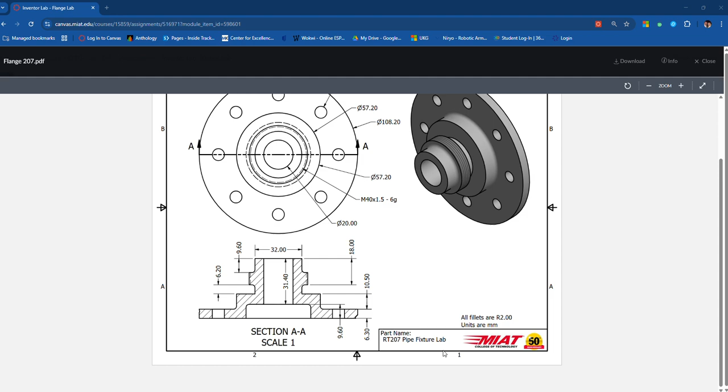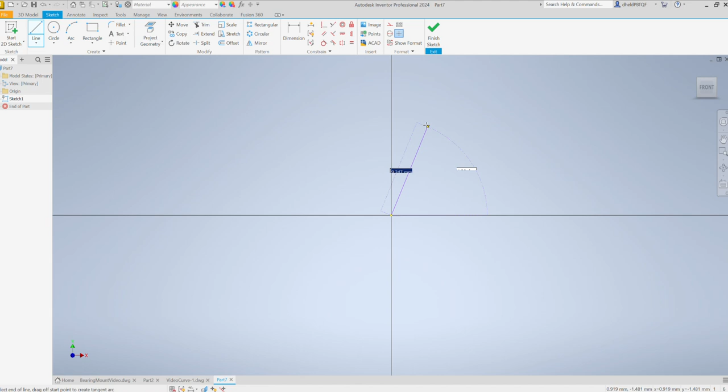So I'm going to go to Inventor and say File, New, Part, and start 2D sketch on the XY plane. Now, you're going to have to do a little math, figure out how tall this is. I'm going to make this that height. So do the math, pause video, or it's 41. Could you figure that out?

Good. Alright, the inner circle is 20, so radius-wise that would be 10, so we're going to come 10, and I'm just going to go ahead and take this all the way down. Alright, next, we have that 32 diameter circle, which would be 16 in radius, and we've already come out 10, so that'd be 6. Okay, now we're coming down, and that first measurement given there is 9.6.

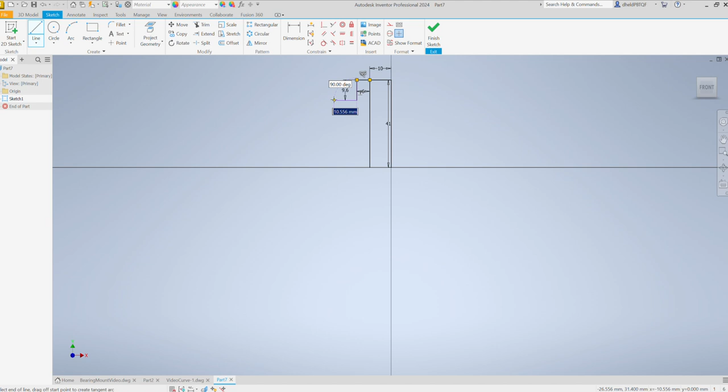Great. Okay, now this part, it would have a diameter of, I'm sorry, 40, but here it'd be a radius of 20. We've already come out 16, so it's 4 more. Okay. Alright, I'm going to clean a couple of these up. And now this part we'll have to do some math too. Try to figure that out on your own. Pause and come on back. Yeah. It's 8.4. Oops. Let me undo that. 8.4. Alright, and then I'll bring that back 4 millimeters, and then I'll come down 6.2.

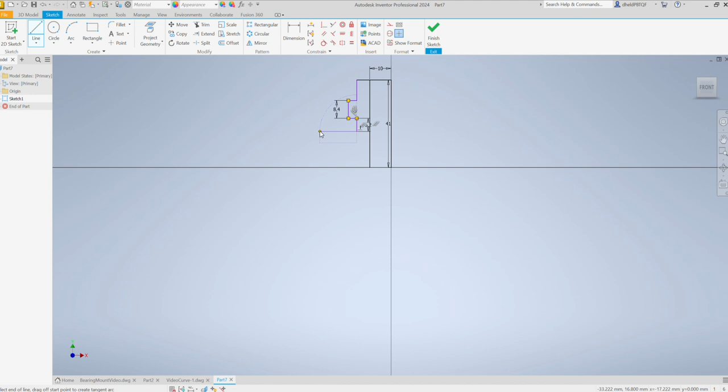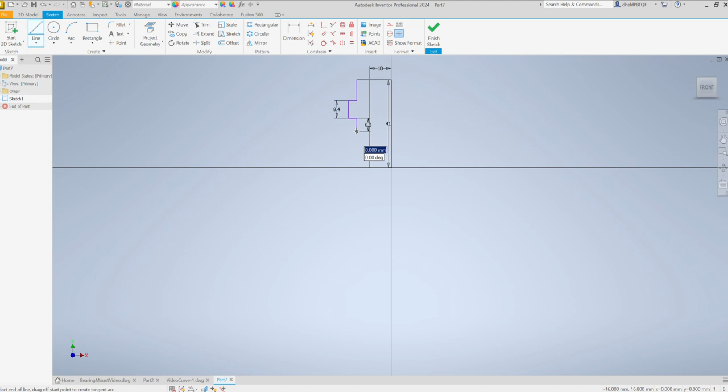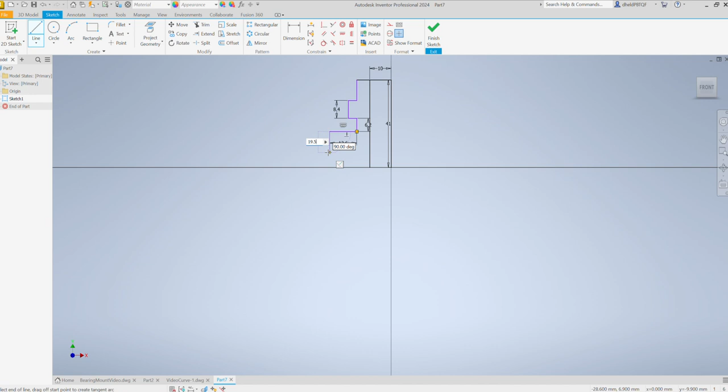Right, and now this next part, I'll escape. This next part is given on the upper part of the drawing, which is 57.2. So you want to divide that by 2, and that's 28.6, but we're already out 16, so we need to subtract 16 from that, which would give us 12.6 on that dimension there. Okay. Now we can bring that down, and that is 10.5. Okay. Whoops. Redo that. 10.5.

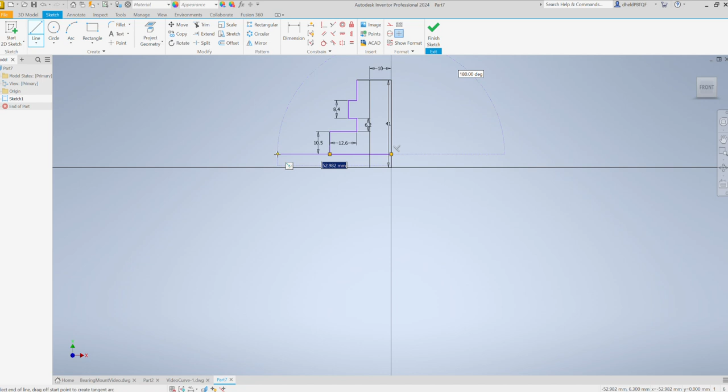Alright. And now we're going out to the biggest dimension, the biggest circle, which is 108.2. We'll divide that by 2. That'll give us 54.1 from the center. So instead of subtracting all this and trying to figure it out, I'm just going to bring that back, and then I'll come forward 54.1. Perfect. And then that comes down here, 6.3, and then we'll just finish it off right there.

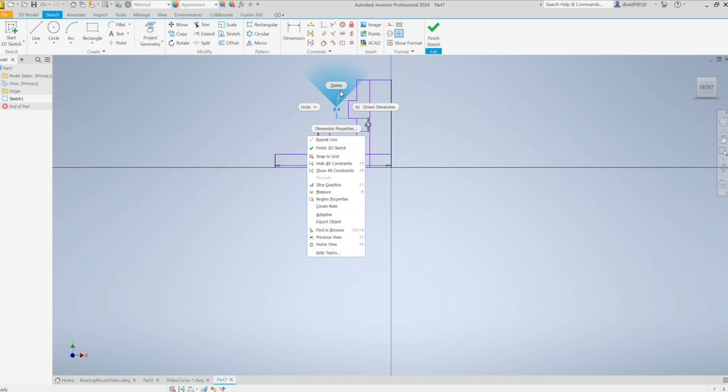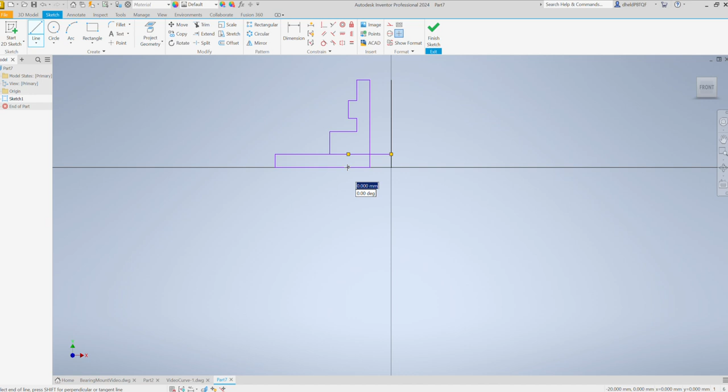Okay. Now I'm going to just remove some of these dimensions, and we'll get trimming up some of those lines in a moment. That's pretty good. I can trim this. I think I need to do some more work in here. And this dimension seems to be missing, but I would go with, it's got to be lined up with that because it's not given, even though it kind of looks like it isn't. So like that. And now if I trim that, this, and hit escape. There we go.

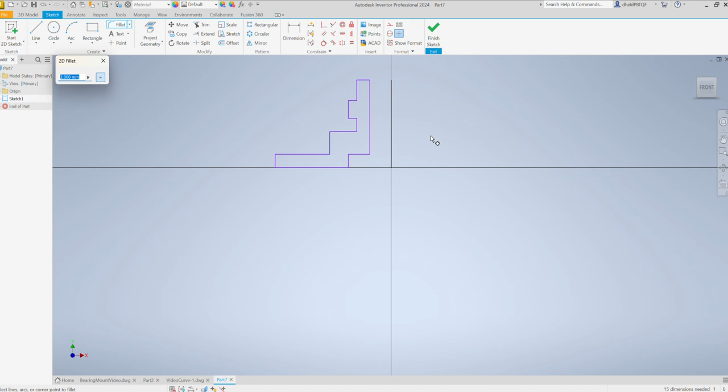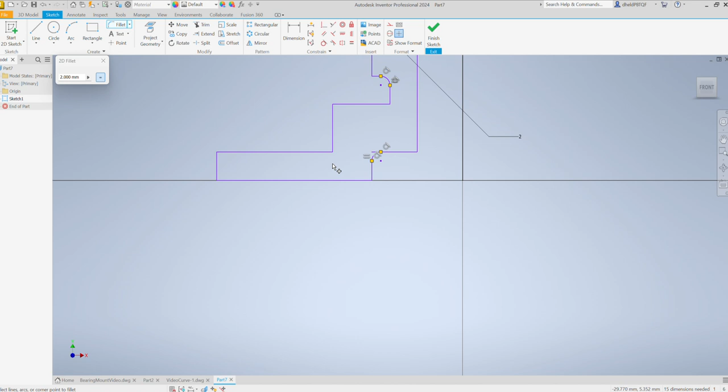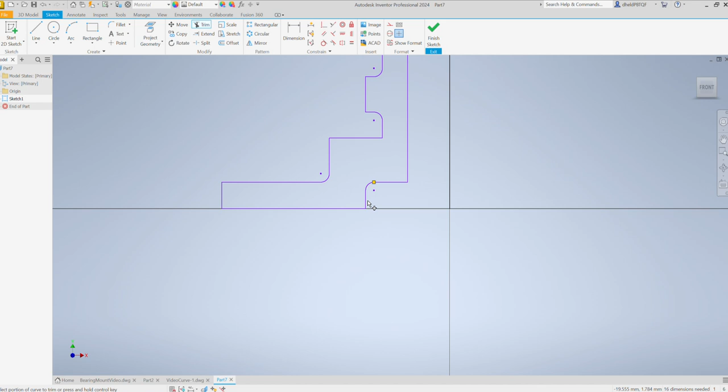Looking good. Alright. Now I'm going to use my fillet. And it's 2. That's good. I want to fillet that. I want to fillet that. I want to fillet this. Like so. Is that it? And right here. It went away. Why can't I do this one? That one and that. Okay. I'll hit escape. We'll drop that. Looking good. Okay. I'm gonna trim that. There we go. Looks good. Alright, so I'm gonna finish my sketch.

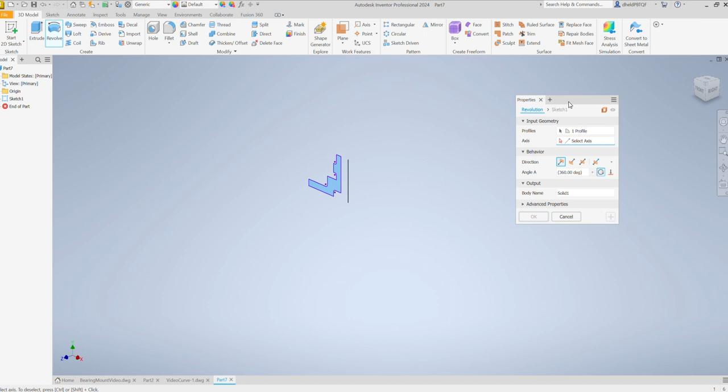And then I'm going to revolve instead of extrude. And I'll bring this over so you can see. So this pops up. Alright, and it's looking for the line. I click on that line, and look at that. Pretty cool. And say OK. Alright, we're ready to go. I'll do the next part in the next video.